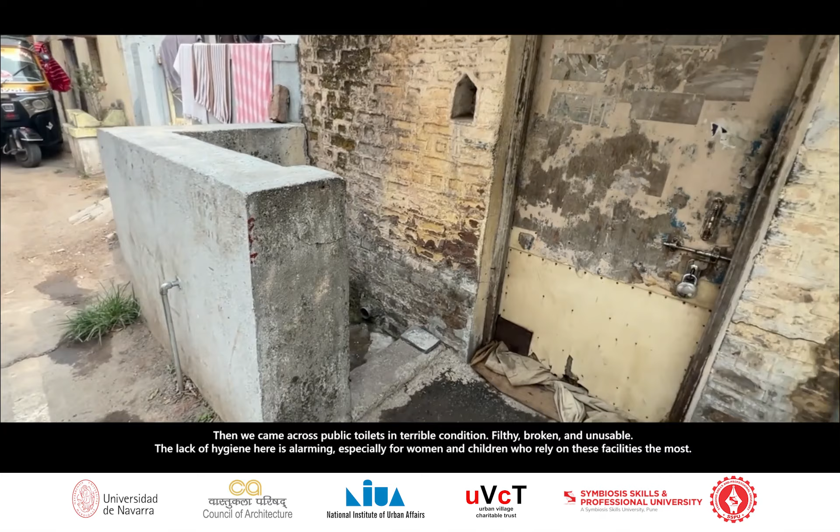Next to homes, we found damaged transformers and exposed wires. A ticking time bomb in plain sight.

People here still live in old brick structures. Their wash areas are on the outskirts, exposed to the weather, dirt, and animals. These homes speak of resilience, but also of a community waiting for modernization that never arrived.

If we want our cities to be truly smart, we must listen to villages like Tathawade. Because a city is not made of concrete, it's made of people.

Meanwhile, just a few streets away, warehouses and commercial shops are booming. They contrast in shape, progress and poverty living as neighbors, but walking in opposite directions.

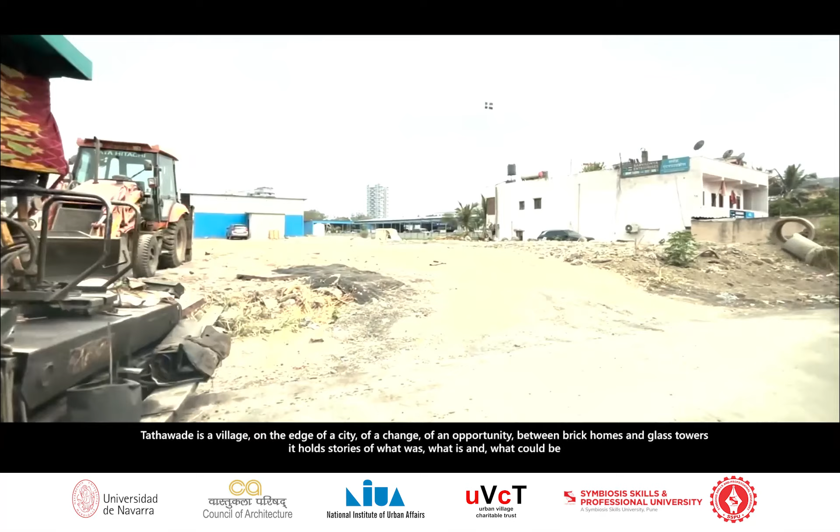Tathawade is a village on the edge of a city, of change, of opportunity. Between brick homes and glass towers, it holds stories of what was, what is, and what could be.

As we walked the streets, we saw garbage everywhere. Footpaths were filled with waste, and not a single sight of a dustbin.

Even the cycling tracks made for clean and safe travel are now parking spots for four-wheelers and vendors selling on the tracks.

Tathawade is well connected to the Mumbai-Bangalore highway, a powerful link to the outside world. Yet, the connection feels meaningless if the area itself is stuck in a loop of neglect.

Everywhere we turned, there was dust, noise, and construction.

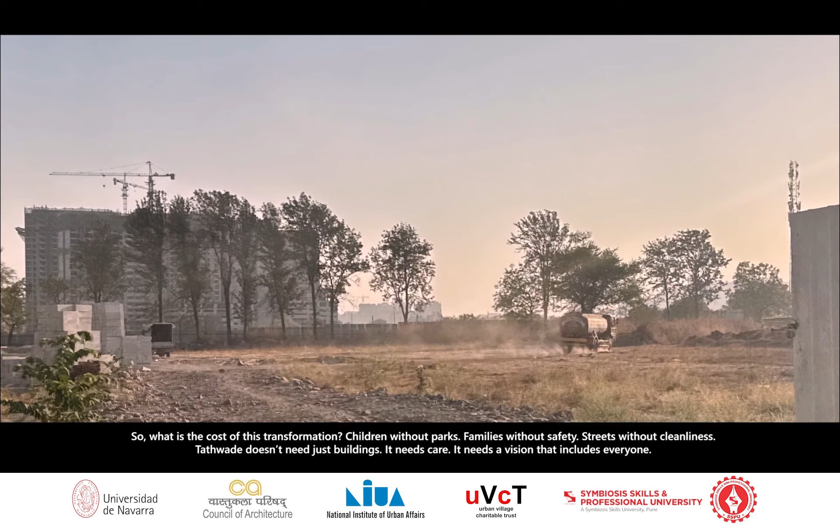Tathawade, a rising urban locality in the western regions of Pimpri-Chinchwad, is situated at a latitude of 18.60 degrees north and longitude of 73.74 degrees east.

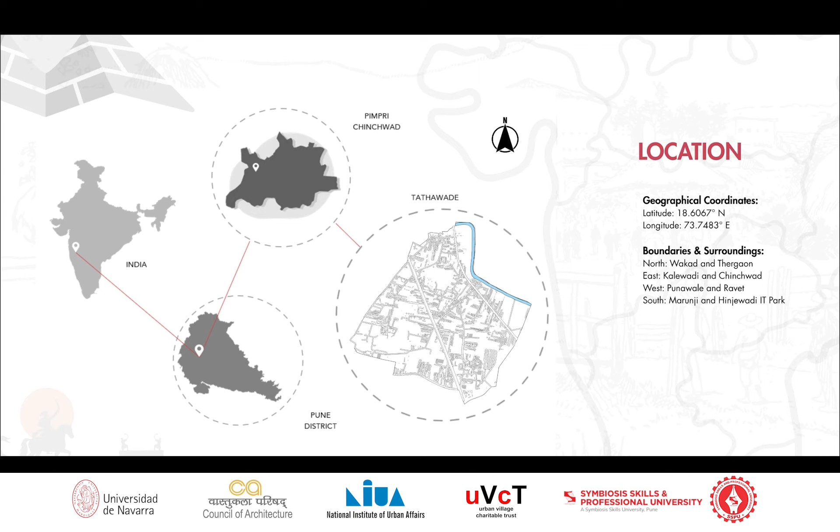It stands at the edge of opportunity, surrounded by Wakad and Thergaon to the north, Kalewadi and Chinchwad to the east, Punawale and Ravet to the west, and the ever-expanding IT hub of Hinjewadi to the south.

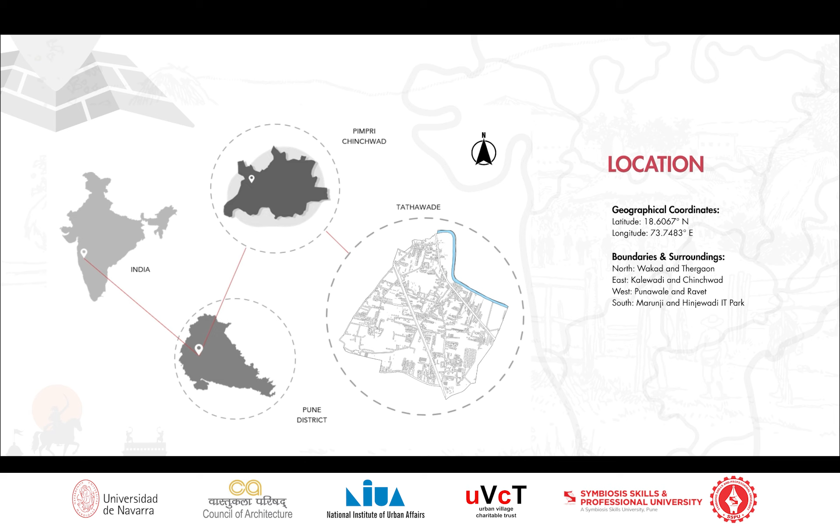Tathawade's road network is built on layers, from national highways to small local streets. At the core of its connectivity lies the Mumbai-Bangalore Highway, NH48.

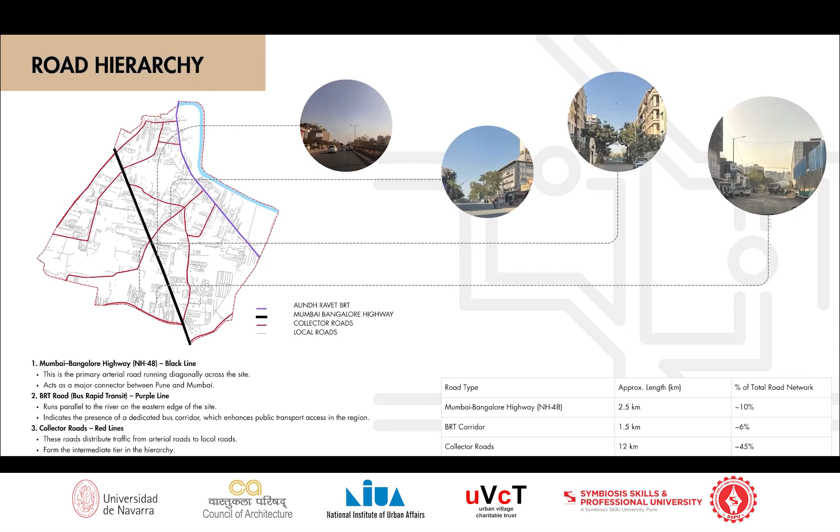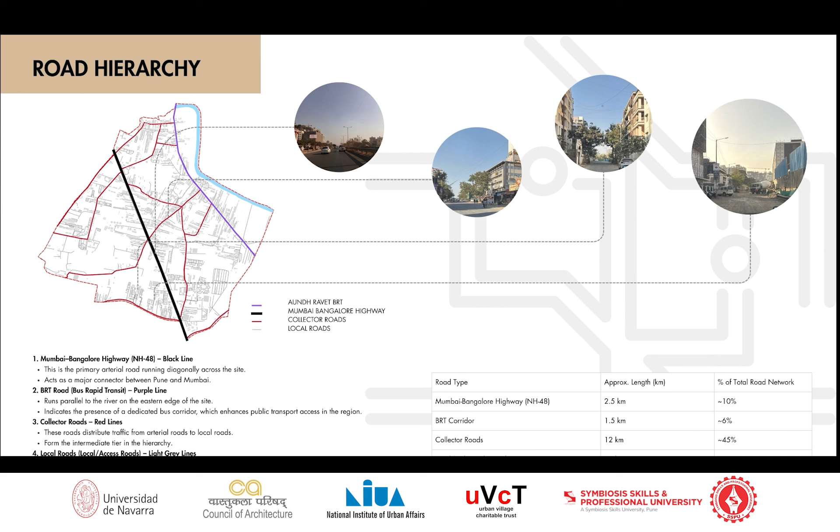This highway does not just pass through, it anchors the area, offering regional and interstate connectivity to Pune, Mumbai and beyond. Running parallel to the eastern edge is the Aundh-Ravet Bus Rapid Transit (BRT) corridor, a dedicated public transport lane that enhances access and reduces travel time for daily commuters.

Tathawade's built form is mostly low-rise, with 1 to 3 story structures spread across the locality. These buildings, made largely of brick and mud masonry, reflect the area's semi-rural past, cost-effectiveness, but not built for vertical growth.

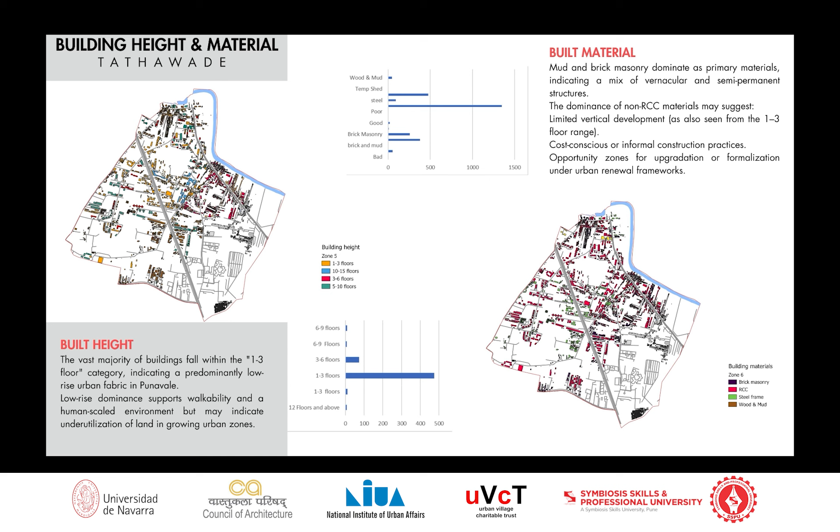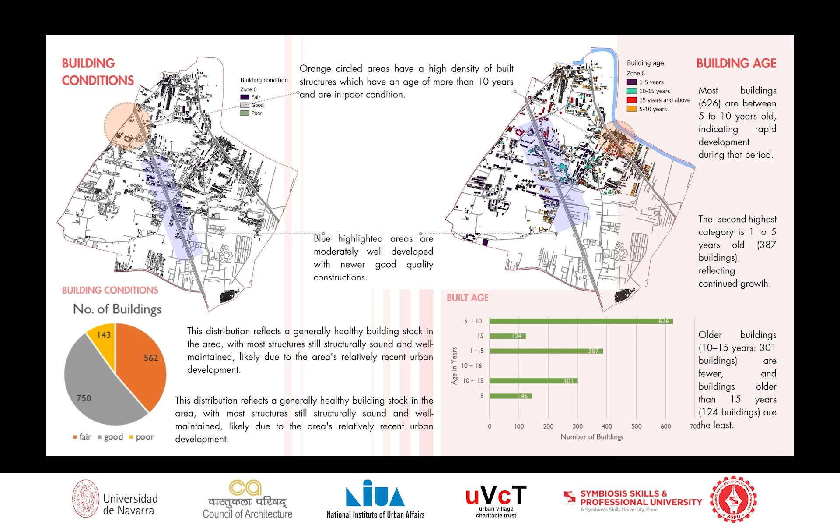Most buildings in Tathawade are less than 10 years old, showing how quickly the area has urbanized in recent years. Newer buildings are well maintained, but in the village core, older structures 10 to 15 years old are beginning to deteriorate. This mix of new growth and aging stock highlights the need for targeted upgradation and renewal, especially where safety and livability are at risk.

With more people and vehicles entering the area every day, these mobility issues are more than inconveniences. They are signs of a system under strain.

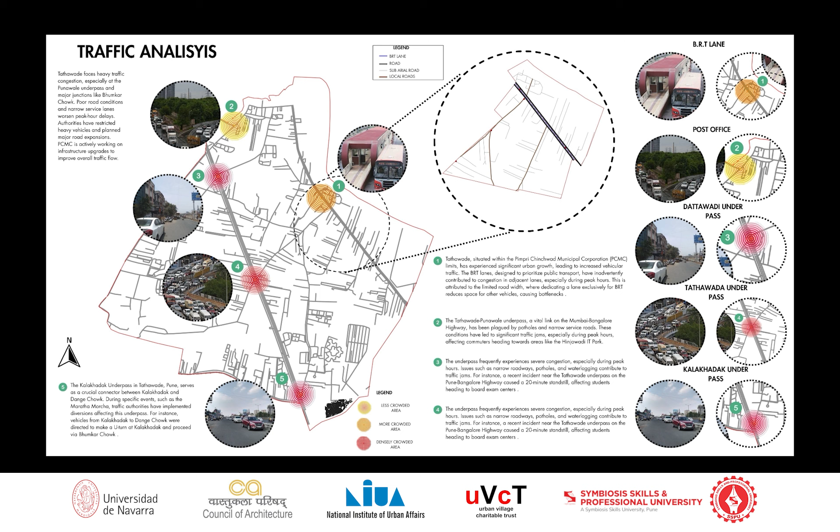For Tathawade to move forward, we must reimagine its streets, wider lanes, better drainage, and multimodal transportation planning, where traffic does not just move, it flows. Beneath the concrete and construction, Tathawade still carries the potential to be green, not just in space, but in spirit.

Once an agricultural landscape, the region has a natural fertile base, with sandy to clay loam soil, ideal for deep-rooted native vegetation. The climate here is classified as tropical savanna, with hot summers reaching up to 40 degrees Celsius and a monsoon season bringing around 900 to 1100 mm of rainfall.

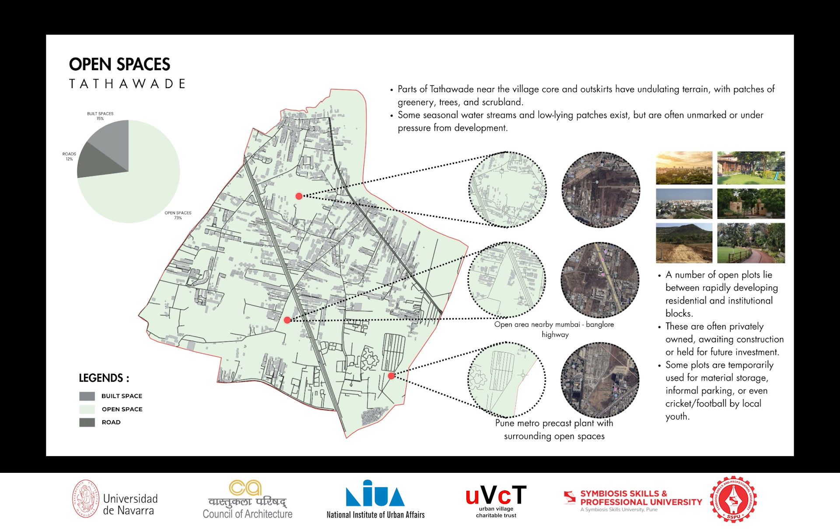Tathawade still has space, and with space comes possibilities. According to our land use analysis, nearly 73% of the area remains open. This includes vacant plots, institutional land, and patches of natural green, scattered across the locality. But while these spaces exist, they are largely unplanned and underutilized. Many are waiting for construction, while others are used informally for parking, material storage, or temporary recreation like cricket or football turfs.

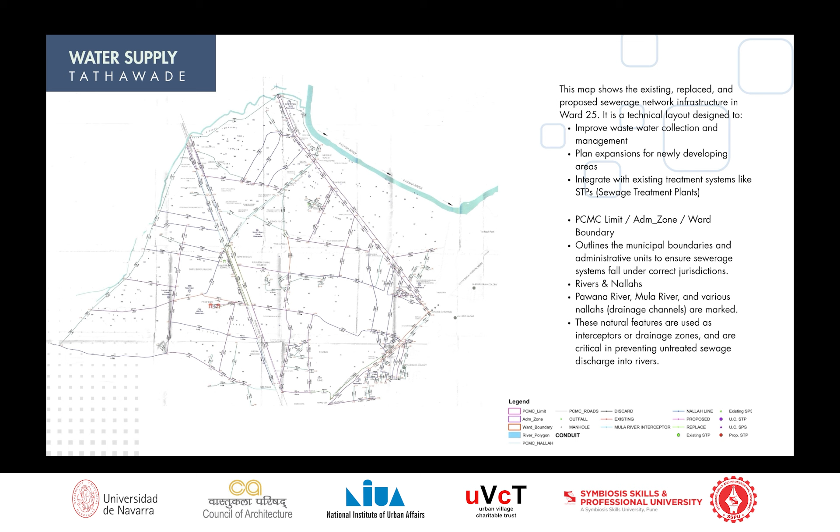A city's health flows through its pipes, and in Tathawade, that flow is still finding its path. As part of Ward 25 under the Pimpri-Chinchwad Municipal Corporation, the area has an expanding sewage and water network designed to support its fast-growing population. The existing infrastructure includes underground pipelines, manholes, garbage bins, and nearby sewage treatment plants, all integrated to manage waste and maintain hygiene. The sewage network, overseen by the Pimpri-Chinchwad Municipal Corporation, plays a vital role in keeping the environment clean and the community healthy.

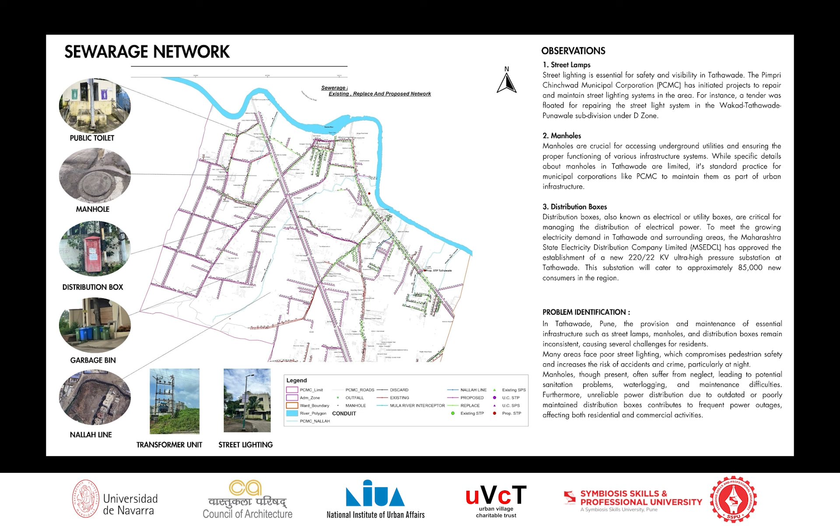The current layout consists of a mix of old and newly installed pipelines, mapped across residential clusters, commercial zones, and institutional areas. Manholes, though present, often suffer from poor maintenance, leading to blockages, waterlogging, and foul odors, especially during the monsoon season.

For any city to grow sustainably, it must match its expansion with equal focus on planning, infrastructure, and accessibility. In Tathawade, our gap analysis reveals a stark mismatch between urban planning standards and existing conditions. Starting with roads, according to national urban guidelines, 12 to 18% of total area should be reserved for roads to ensure smooth traffic, safe movement, and emergency access. But here, road coverage is only around 10%, below the minimum threshold. This shortage results in narrow internal roads, insufficient connectivity, and slower response times during congestion and emergencies.

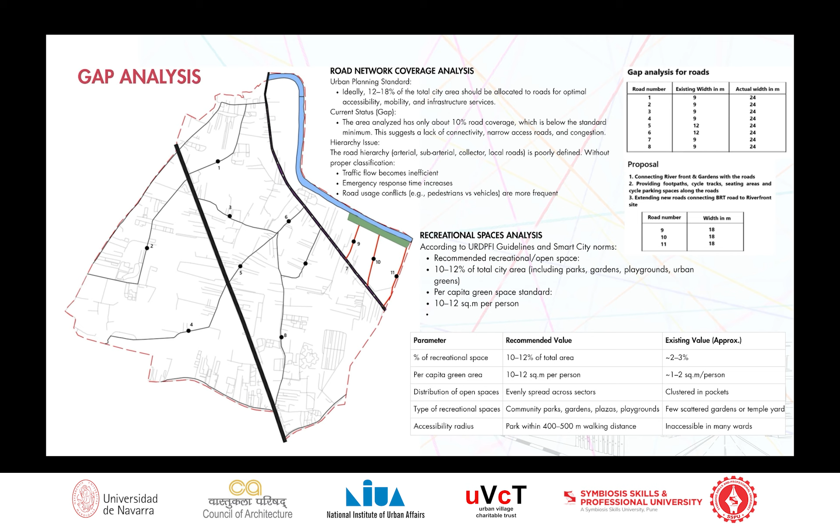Next, we looked at recreational and green spaces. The recommended standard is 10 to 12% of city area, along with 10 to 12 square meters of open space per person. Tathawade, however, offers only 2 to 3% open space and barely 1 to 2 square meters per person.

Our vision statement says: to develop Tathawade as a model of sustainable urban growth, where eco-friendly infrastructure and vibrant public spaces, including non-motorized transport, accessible riverfront, and green recreational areas, catalyze economic growth, enhance environmental resilience, and create a healthy, inclusive community for all.

Streets are not just for cars, they are veins of a city, meant to carry life, movement, and connection. Our proposal for a 24-meter wide road in Tathawade is built around this philosophy, where every mode of movement is respected and every user feels safe. The cross-section is designed for balance, safety, and sustainability on both sides.

We began with 2-meter wide footpaths, ensuring safe and accessible pedestrian movement. These footpaths are well defined and shaped, encouraging walking in everyday life. Next comes the 1.8-meter cycle track, a dedicated space for bicycles, supporting green mobility and reducing reliance on two-wheelers and cars. A 1.3-meter buffer zone follows, giving space for street lights, trees, bollards, and benches. This buffer also acts as a safety zone, separating slow and fast-moving users.

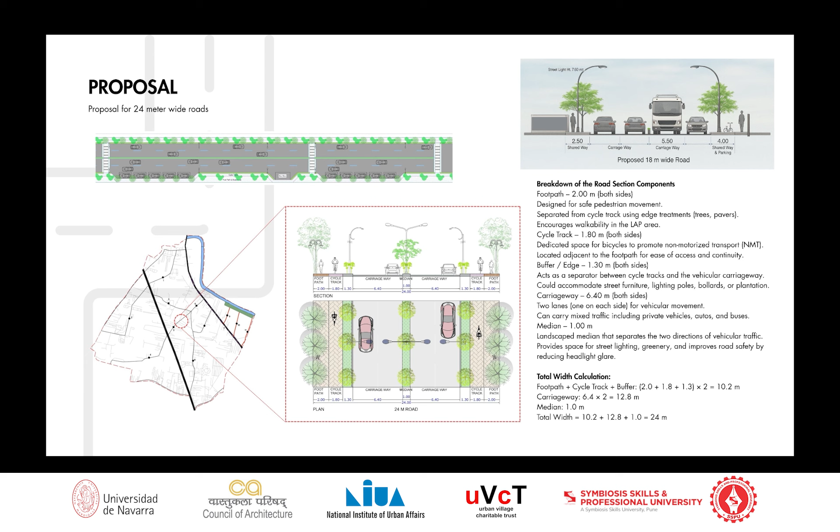The main carriageway includes 2 lanes of 6.4 meters each, designed to carry mixed traffic including private vehicles, public transport, and emergency services. At the center lies a 1-meter landscaped median, not just for dividing traffic but also reducing headlight glare and enhancing aesthetics.

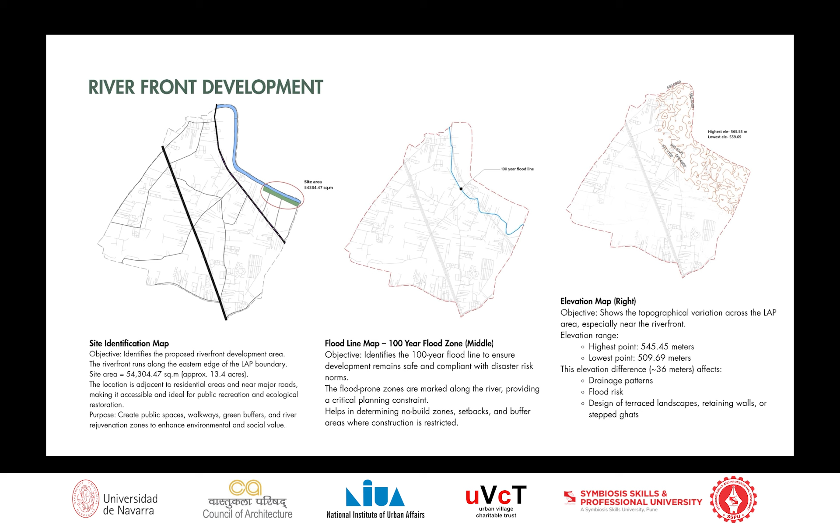An elevation study revealed a 36-meter slope from the highest to the lowest point, guiding us to design terraced landscapes, stepped ghats, and effective drainage. The riverfront is divided into 4 key zones, each offering a unique experience.

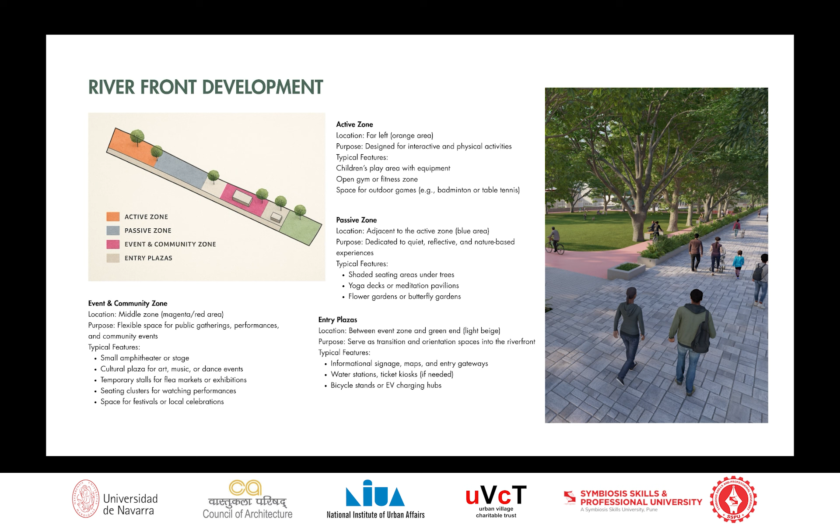The active zone includes play areas, outdoor fitness spaces, and courts, encouraging movement and activity. The passive zone offers calm, with shaded seating, yoga decks, and butterfly gardens for those seeking relaxation and quiet. The event and community zone is a flexible space for cultural gatherings, public events, local markets, and celebrations, making the river a stage for public life.

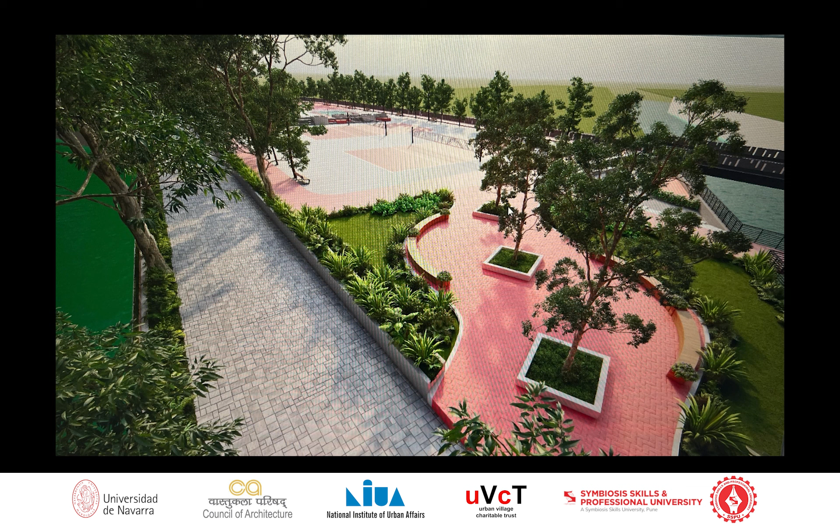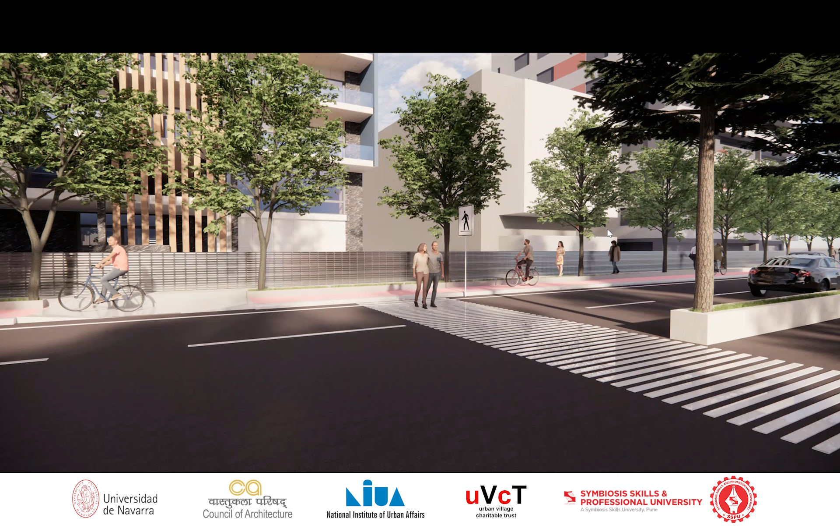As it bridged emerging technologies with real-world design and planning, AI provided tools for data-driven decision-making, while VR offered immersive visualization of spaces before they were built. Together, they enhanced our ability to design smarter, more sustainable, and human-centric environments, skills that are essential in modern urban development.